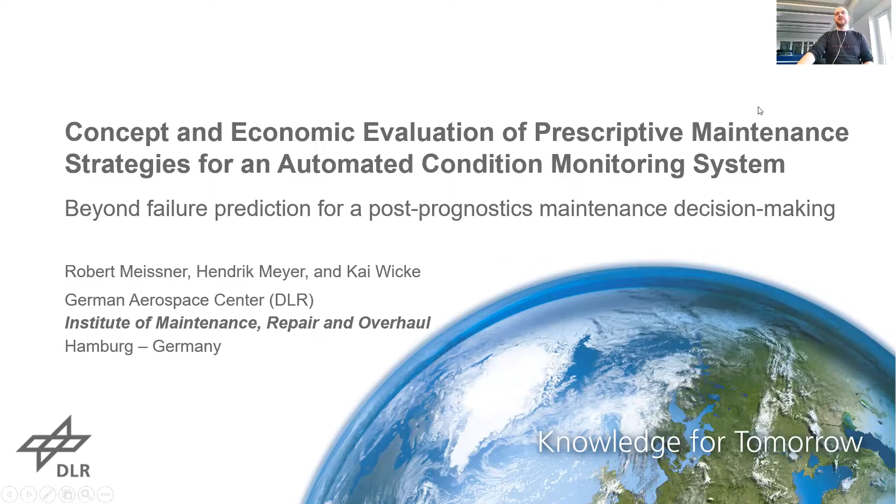Hello and welcome to my presentation with the title Concept and Economic Evaluation of Prescriptive Maintenance Strategies for an Automated Condition Monitoring System. My name is Robert Meissner. I'm from the German Aerospace Center, in particular from the Institute of Maintenance, Repair and Overhaul, located in Hamburg, Germany. First, let me give you a brief overview about the motivation of our study and the objectives we are trying to follow with this presentation.

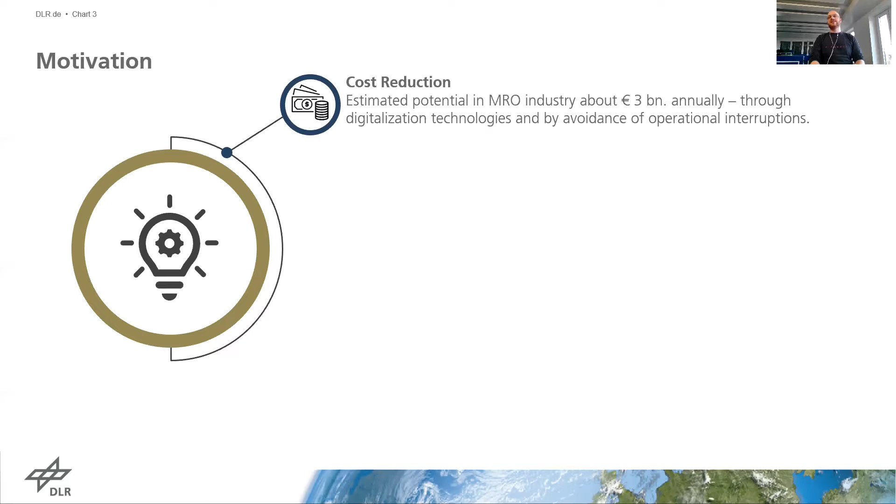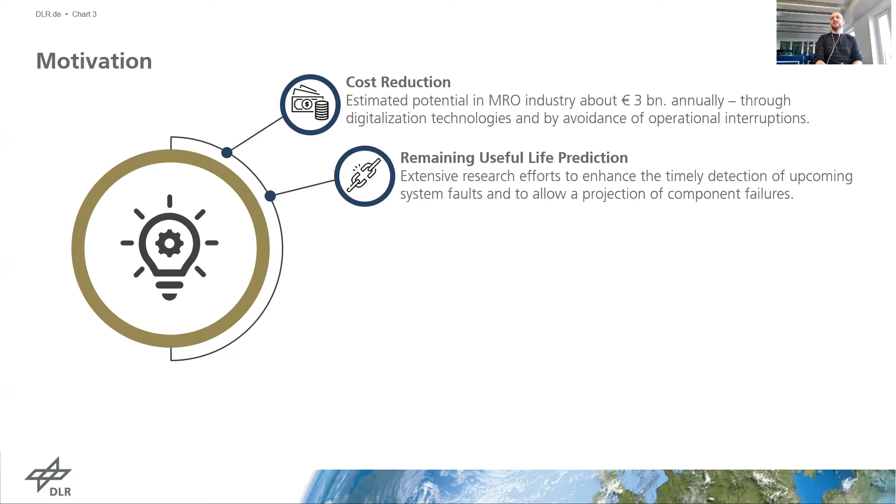The International Air Transport Association estimates a cost-saving potential within the aircraft MRO industry of about 3 billion euros annually, achieved mainly through the implementation of digitalization technologies and the subsequent avoidance of operational interruptions. Additionally, there's an extensive body of literature in the field of remaining useful life prediction, and many of these publications try to timely detect upcoming system faults and allow a projection of component failures.

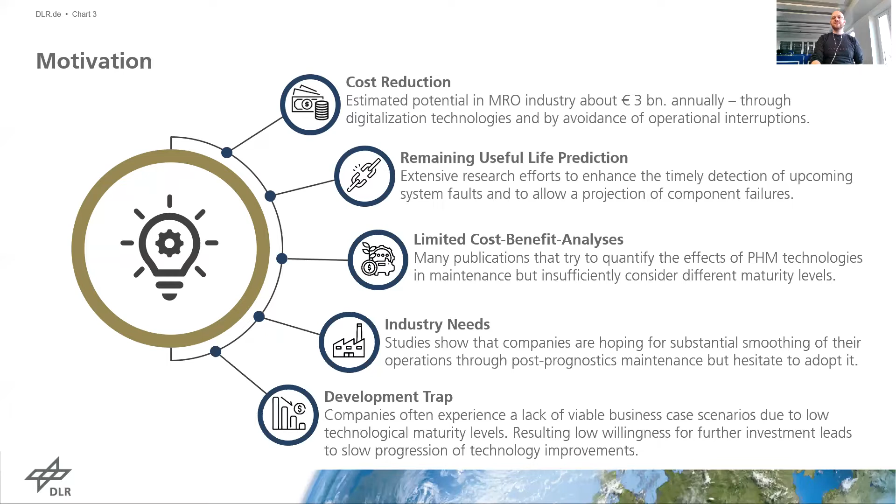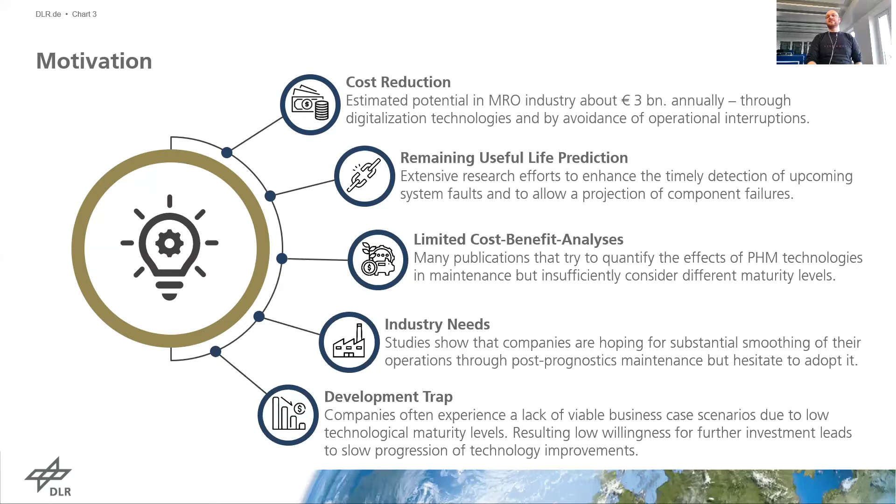Furthermore, there's quite a variety of publications that try to quantify the effects of PHM technologies on aircraft maintenance operations. However, many of these publications insufficiently consider different maturity levels of the underlying PHM technology. Additionally, several studies show that companies are hoping for substantial smoothing of their operations through post-prognostic maintenance, but they are hesitant to adopt it. A lot of this hesitancy comes from the lack of identification of viable business case scenarios, mainly due to low technological maturity levels of the underlying PHM technology. This lack of a viable business case scenario results in low willingness to further invest, ultimately leading to a slow progression of technology improvements.

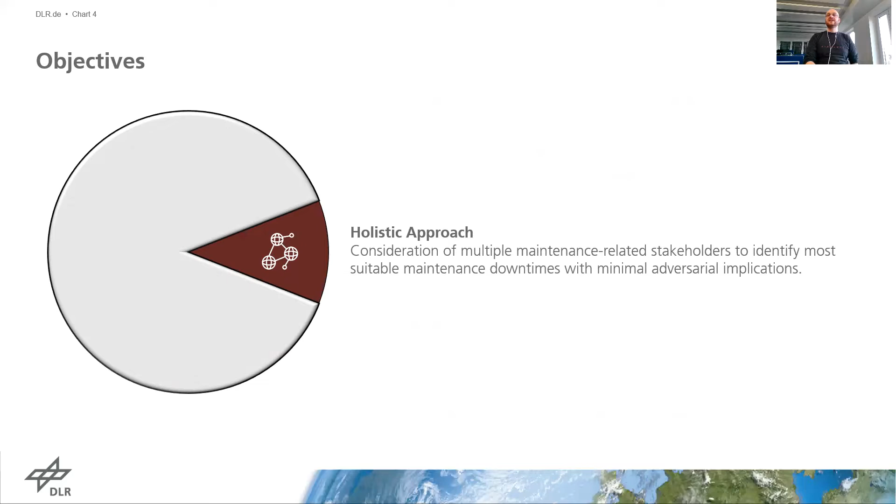We are trying to follow three objectives for this presentation. First, we would like to introduce a holistic approach by considering multiple maintenance-related stakeholders and their individual objectives and needs, to identify the most suitable maintenance downtimes with minimal adversarial implications for each individual stakeholder.

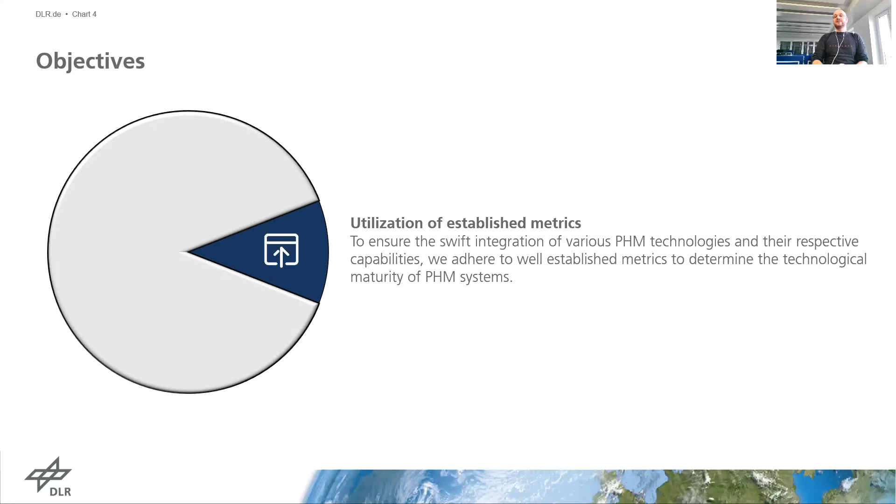Then we want to utilize established metrics in the field of PHM technology evaluation, to ensure a swift integration of various PHM technologies and their respective capabilities, and a quick estimation of the subsequent effect for the technology expert.

Last but not least, to increase the confidence in the viability of our simulation results, we want to calculate different performance indicators that strongly adhere to real-life parameters used by practitioners, and that enable a more complete representation of the expected implications of adopting such a prognostic-based maintenance strategy.

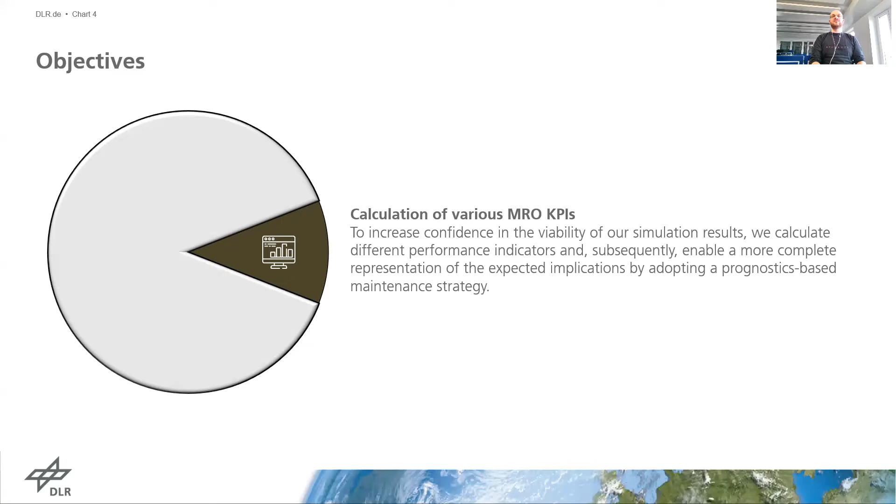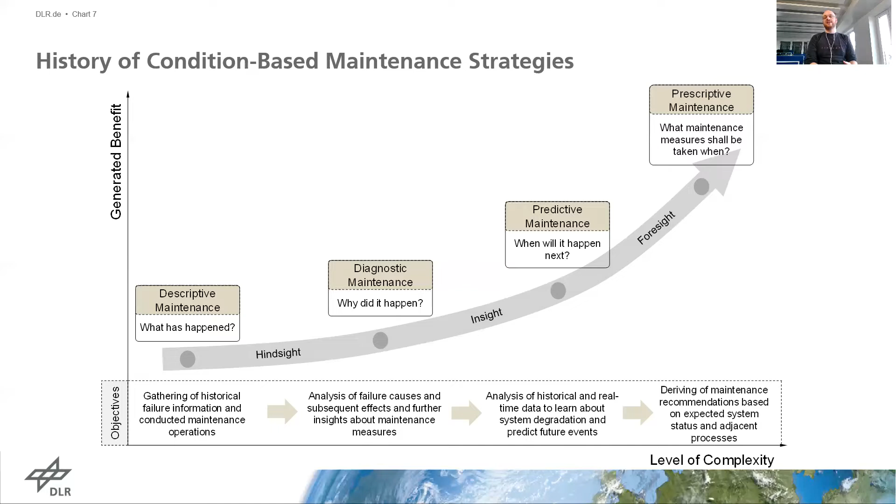If we're trying to answer not only when a specific asset is going to fail, but what maintenance measures I shall take, then we are talking about prescriptive maintenance. There we extend our view beyond the asset itself. The asset could be the aircraft, could be an engine, could be a tire. We try to derive the most suitable maintenance opportunity by considering adjacent processes and the state of the involved stakeholders.

For some of you, prescriptive maintenance might be a new phrase, so let me give you a brief definition that we at least agree on in our institute. We define prescriptive maintenance as utilizing a system's failure projection to minimize the adversarial implications for the involved stakeholders, by an optimized proactive scheduling of necessary maintenance restoration tasks.

As I've shown you, it is an evolution of predictive maintenance, which for us solely focuses on upcoming system failures and doesn't include any surrounding processes. Therefore, prescriptive maintenance, because it does include these surrounding processes, allows a more holistic analysis and optimization of maintenance measures. Let me highlight a few aspects I see as important in this definition.

First, we are talking about a failure projection because this is an evolution of predictive maintenance. This failure projection is necessary to determine the suitable maintenance opportunities and also identify when ultimately our system is going to fail, trying to connect the corresponding tasks to each maintenance opportunity.

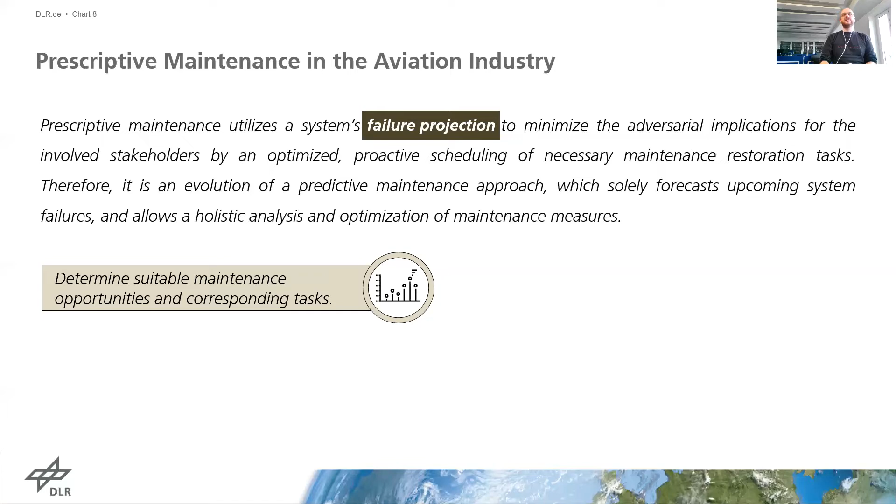Then I highlighted the adversarial implication, indicating that we are not just focusing on pure monetary metric consideration, but trying to extend our metrics towards aspects such as ecological impacts or societal impacts. However, by societal impacts we mean the impacts right now on people working within the MRO industry, and not people outside of the MRO industry.

Then we are trying to shift the focus from the asset itself towards individual stakeholders' needs, because ultimately these stakeholders need to be convinced about the viability of the underlying business case scenario and need to be convinced that spending further on the development of such PHM technologies will ultimately yield any benefit from them.

And last but not least, I mentioned it earlier already, the holistic analysis. We understand holistic analysis by not just focusing on aircraft maintenance operations, but also trying to incorporate different aspects of daily airline routines, such as the airline operation itself, but also subsidiary services such as supply chain management.

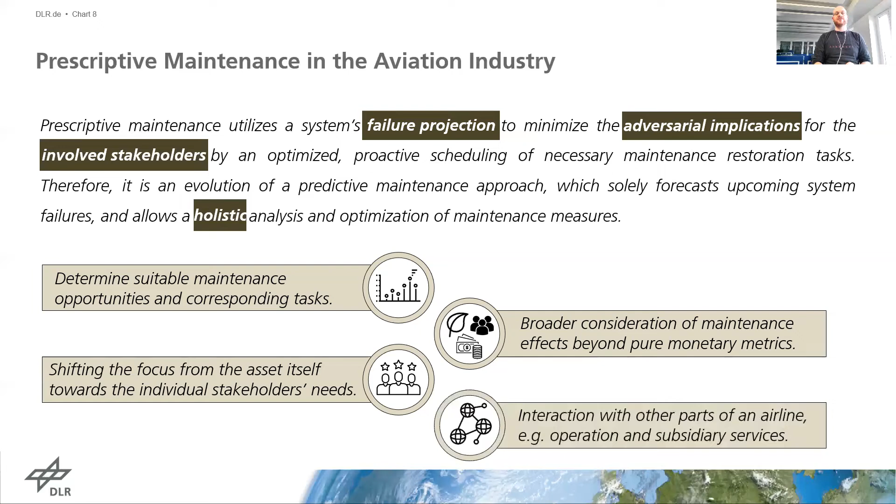Now let's talk about the use case scenario that we have examined with our work here. We had two research questions, one main one and one sub-question. The main one was: how does the maintenance performance change with the introduction of a prognostic-based maintenance strategy? And also, how does it change for different prognostic horizons? The prognostic horizon for us is an indicator for the technological maturity of the underlying system.

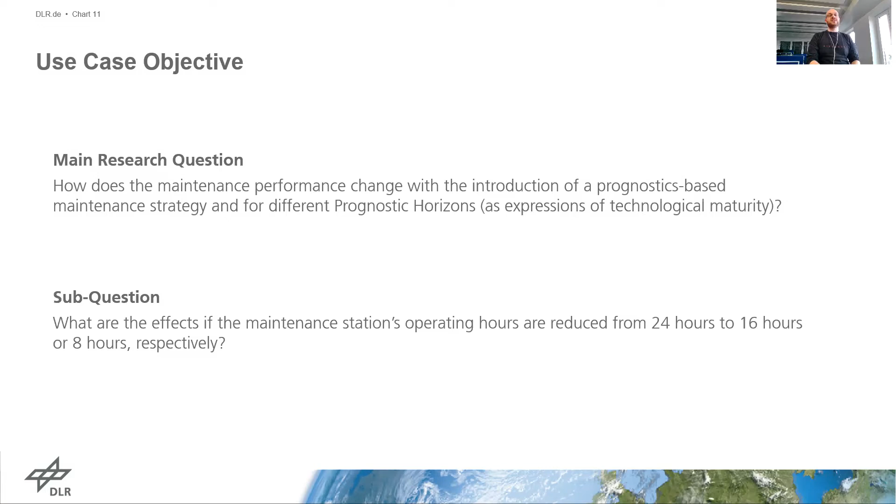And secondly, the sub-question was: what are the effects if the maintenance station's operating hours are reduced from 24 hours to 16 hours or 8 hours respectively? What it means, we will see later.

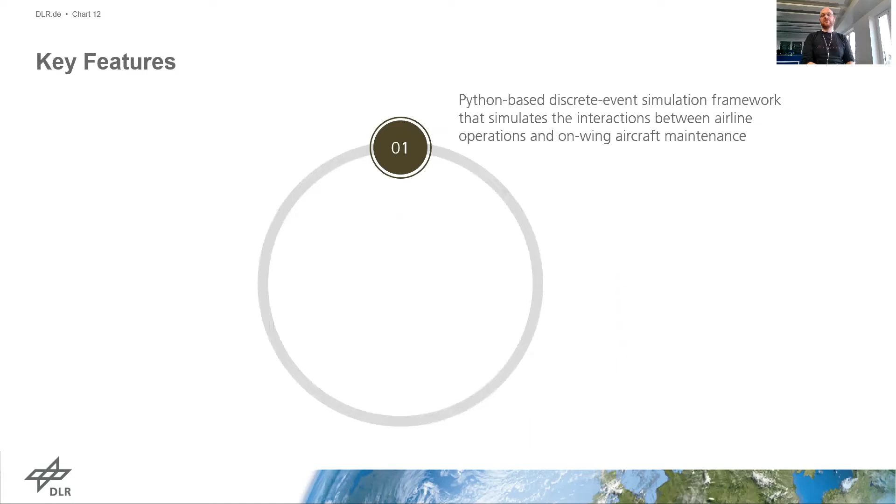First, let me come to some key features of our analysis. For this analysis, we have used a Python-based discrete event simulation framework. This framework is called PREMATE. PREMATE stands for Prescriptive Maintenance Developer. And this framework simulates the interaction between airline operations and on-wing aircraft maintenance. At least in this use case, it does. In reality, PREMATE is capable of extending the interactions and also considering some sort of supply chain management.

Then we have simulated an aircraft fleet that consists of 5 A320 aircraft. And these A320 aircraft have been scheduled to follow a representative pre-pandemic flight schedule from a major German airline.

And we also modeled some limitations of availability of ground resources. These ground resources were mainly available qualified mechanics. And we also limited the available maintenance hub that can be taken and chosen from for the maintenance task execution.

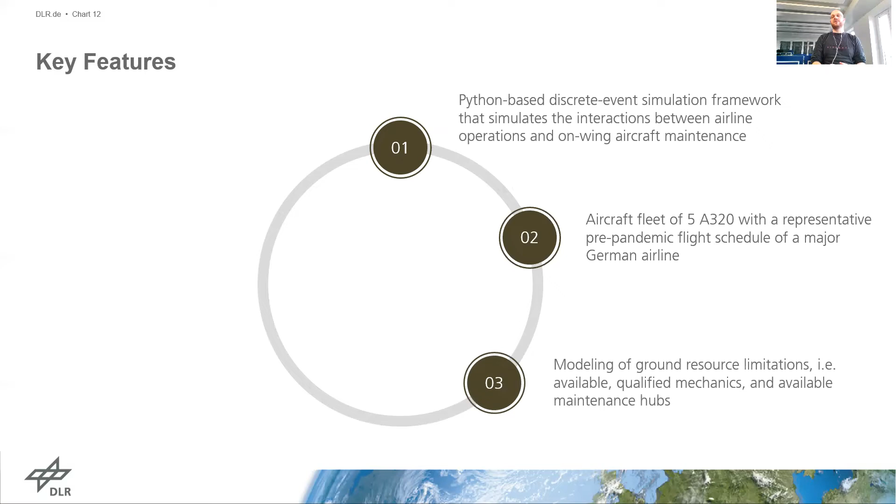Then, as I mentioned earlier, we varied the prognostic horizon of the underlying PHM technology, and we also varied the availability of the maintenance staff, leading to this 16 or 8 hours maintenance operations at our maintenance hub.

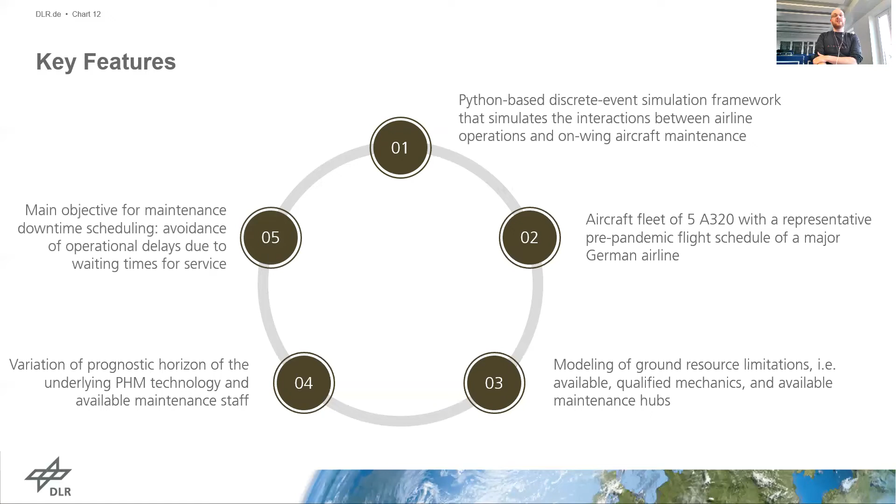And last but not least, the main objective for our maintenance downtime scheduling was the avoidance of operational delays due to waiting times for services. Although there are quite a number of objectives, we didn't choose any monetary aspects, but wanted to stick with the objective to avoid these operational delays.

Our use case scenario was the tire pressure maintenance task. And how does it look like, conventional tire pressure maintenance? Tire manufacturers required aircraft operators to perform a manual tire pressure check every third calendar day. And before a viable pressure measurement can be conducted, there needs to be an extended cool down time of at least 3 hours after landing before such a pressure measurement task can take place.

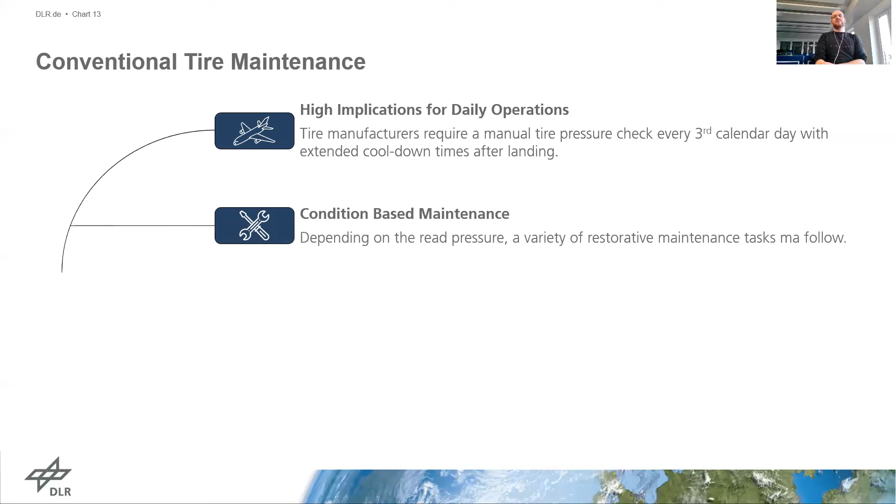Then the tire pressure maintenance task is a pure condition-based maintenance task. Besides these hard time interval pressure measurements, we are having maintenance tasks issued solely on the read tire pressure. And there's quite a variety of these restorative maintenance tasks, and they can range from simple repressurization tasks up to, for deeply underinflated tires, up to a tire replacement.

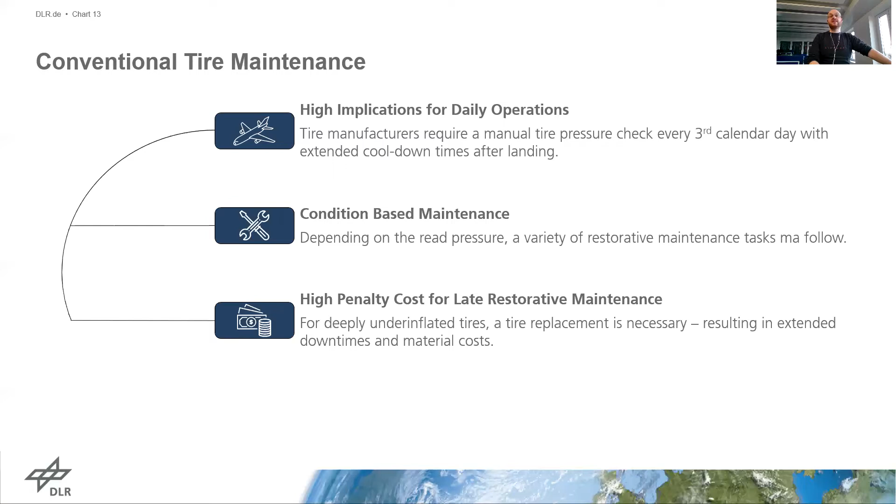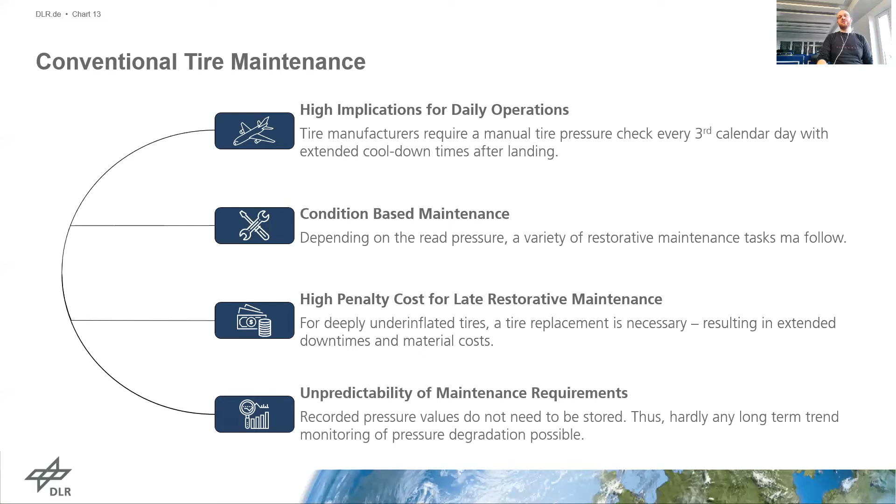And a tire replacement by nature results in extended maintenance downtimes and excessive material costs. And last but not least, because the recorded pressure values do not need to be stored, at least not from a regulatory standpoint, it is hardly possible to enable some long-term trend monitoring of the pressure degradation of the aircraft.

Let me quickly come to the underlying scheduling method that we have applied. So here we can see a timeline, and let's just assume a certain portion of the day is blocked for non-operating hours at our home base. So no aircraft is allowed to land or take off in this specific time frame.

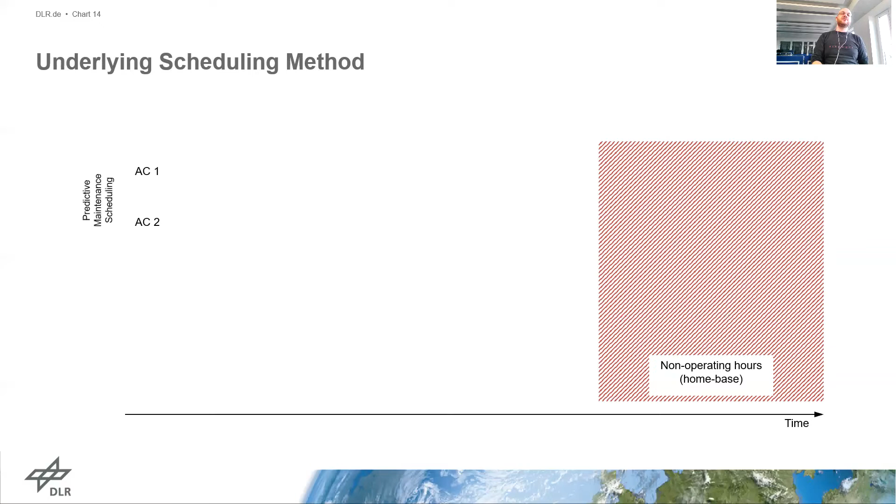And here we have 2 aircraft that are following a certain flight schedule. And first, we are looking into predictive maintenance scheduling. As I said, the aircraft are following our flight schedules, having some inbound flights to our designated maintenance base and some outbound flights to some random outside stations.

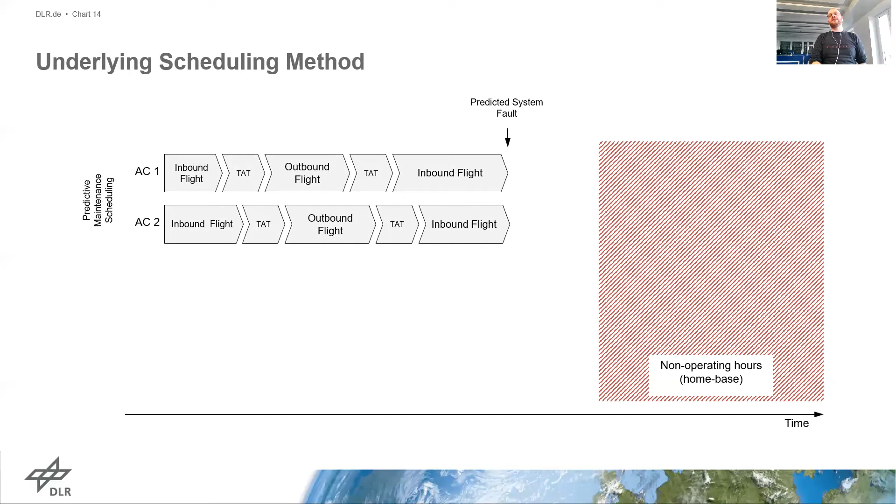And incidentally, both aircraft will require restorative maintenance tasks at the same time. However, I have a limitation of my maintenance resources to just 1 aircraft that can be served at the same time. And therefore, if I choose aircraft 1 to be served, the second aircraft needs to wait for its service to complete.

While the first aircraft has been served, it can commence its outbound flight right before the beginning of the non-operating hours. Right at this point, the second aircraft can start to be served with its maintenance task. However, due to the time shift, the end of the maintenance task has been shifted well within the non-operating hour phase of the day, resulting in operational delays for my second aircraft.

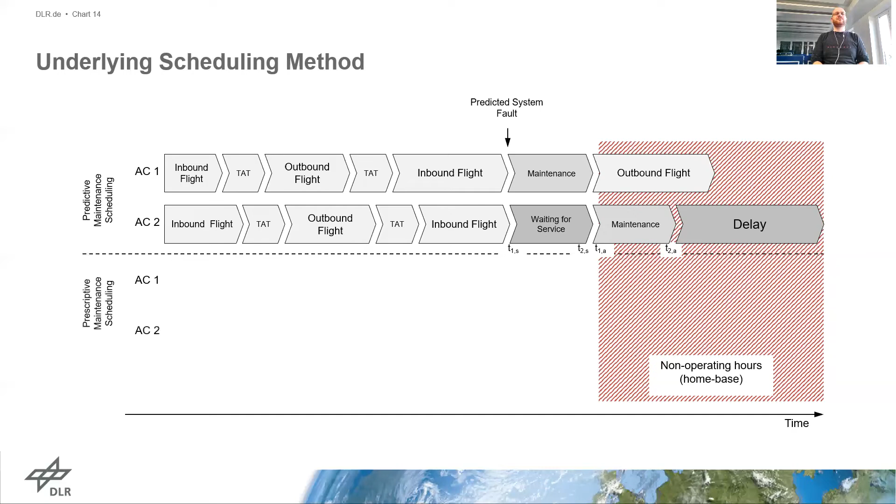So what does the prescriptive maintenance scheduling look like now? I have the first aircraft with an inbound flight, so I'm at my designated maintenance station, and I will reschedule the maintenance task to exactly the time span needed and have it completed for the first aircraft. The second aircraft will just normally continue its flight rotation plan. Once the maintenance task is completed for the first aircraft, it will go back into service and also follow its flight rotation plan.

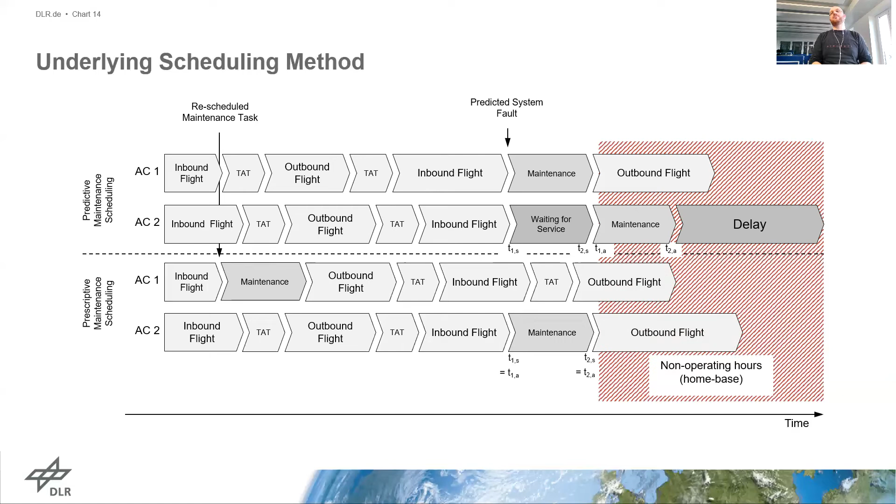Then I'm coming to, for the second aircraft, the predictive system fault timestamp. Now I can see I don't have any other aircraft that needs to be served at that time, so my maintenance task can take place at the intended time slot. This leads to the scenario that both aircraft can commence their outbound flight right before the beginning of the non-operating hour period. So what does it look like now in the results of our study?

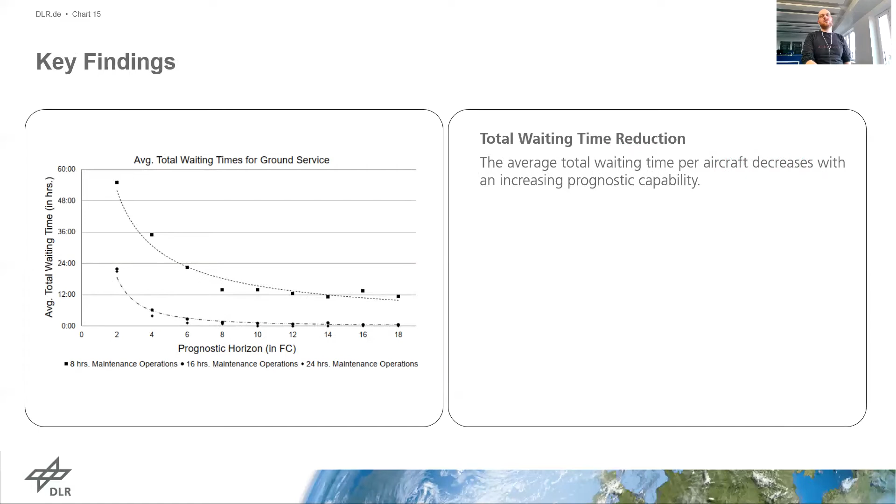First of all, we have plotted here the average total waiting time per aircraft over our simulation time span. The simulation time span here was 30 days, and you can see the total waiting time plotted over the prognostic horizon. First, what we can observe is that the total waiting time is continuously decreasing for increasing prognostic capabilities.

However, at least for our parameter setting, there's a saturation point at about 6 to 8 flight cycles. After this saturation point has been passed, any addition of prognostic horizon capability will yield a decreasing improvement of total waiting time reduction.

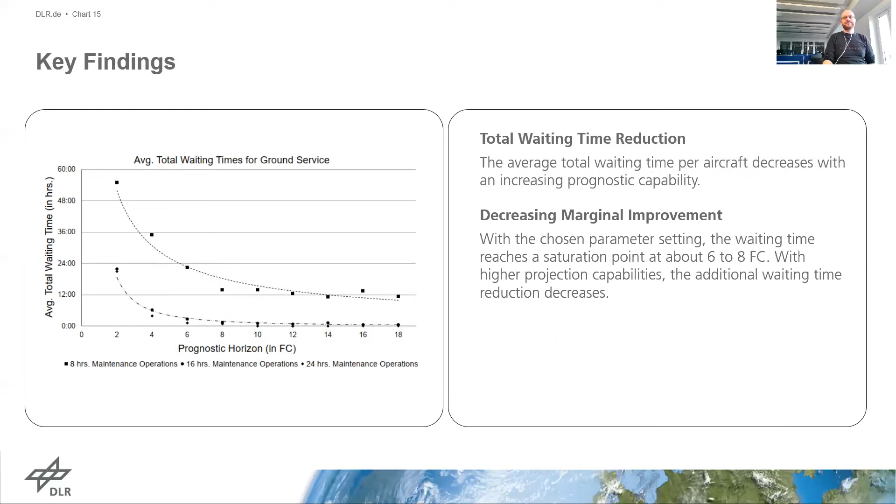Furthermore, as indicated by the different shapes of the little dots here, we can see that between 16 and 24 hours of maintenance operation, indicated by the circle and diamond shaped dots, there's hardly any difference in the total waiting time. However, if we decrease our maintenance operations to 8 hours a day, we can see there's a significant increase of the resulting waiting time for each individual aircraft.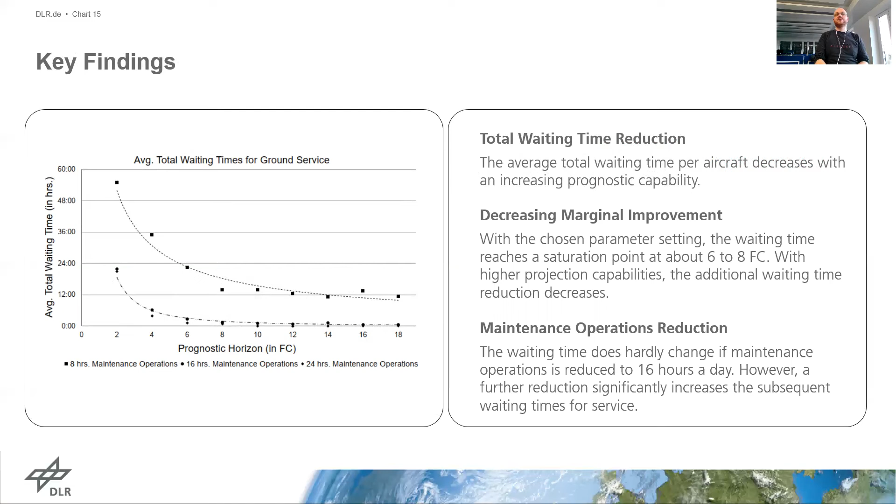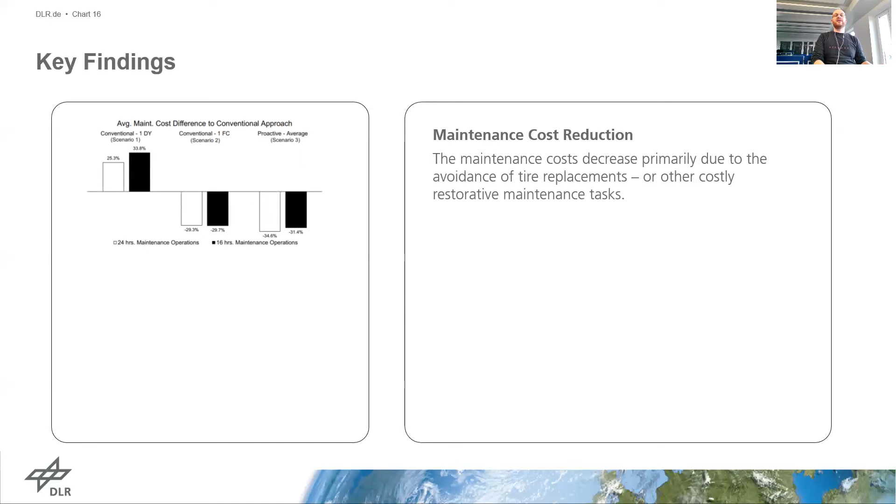If I measure more frequently, I will detect underinflations of my tire more frequently, and therefore I am able to avoid deeply underinflated tires on a more regular basis. However, what I also observe is that due to the little time needed for completion of a manual tire pressure reading task, and therefore the little cost share associated with it, the pure avoidance of manual tire pressure maintenance tasks only yields very little advantage. Therefore, it's much more important to avoid costly maintenance tasks than to reduce short maintenance tasks, such as the pressure reading task, by costly automating or building up an automated infrastructure.

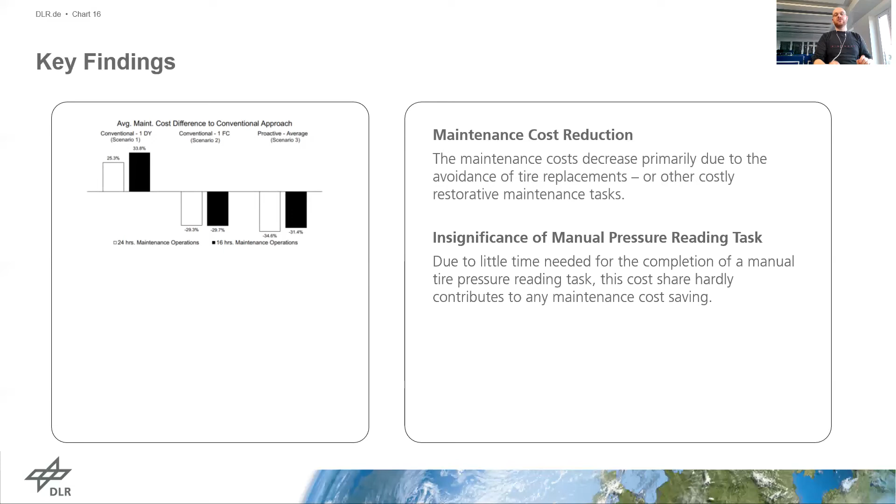This is due to the movement of the maintenance task to earlier time slots where it actually wouldn't be necessary at this point, and therefore this increases the maintenance task frequency. An increased maintenance task frequency combined with the extended cooldown time after landing basically eats up all our improvements by avoiding this competition for the limited ground resources.

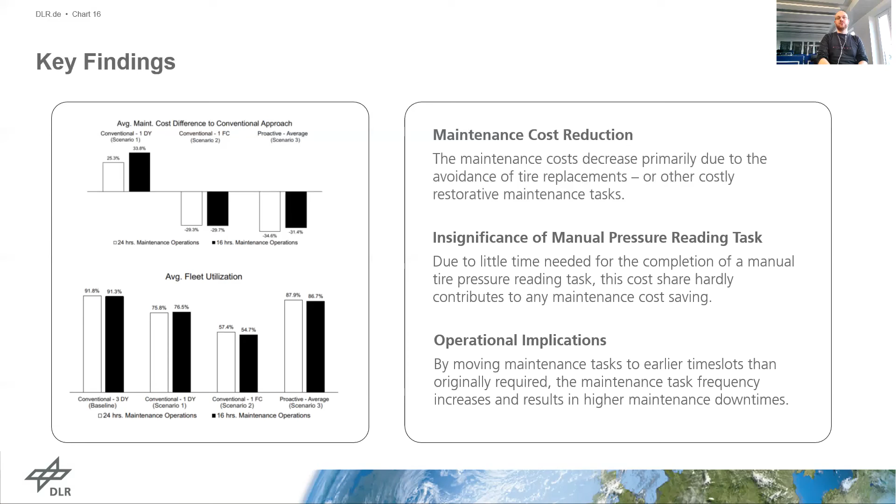So what is the outlook from our studies? What we identify as next step is, first of all, there needs to be some inclusion of environmental factors. Here we have mainly focused on time and cost aspects, but as the focus from our society and attention from politics and regulation shifts more to aspects of sustainability, we are advised to include CO2 equivalent emissions as well into the maintenance task identification here.

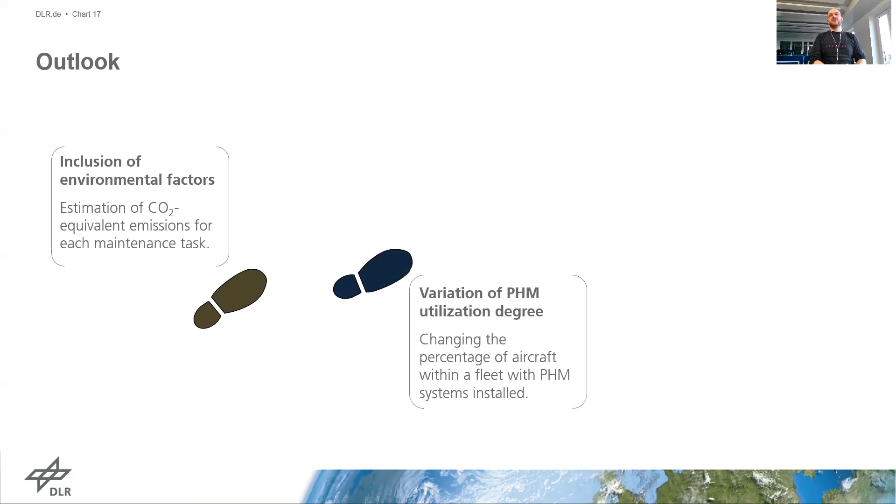Also, for our scenario, we assume that all 5 aircraft are equipped at the same time with the same PHM technology. However, in reality, there would be a continuous rollout of such a technology, and therefore we need to evaluate the effect for a variation of this utilization degree.

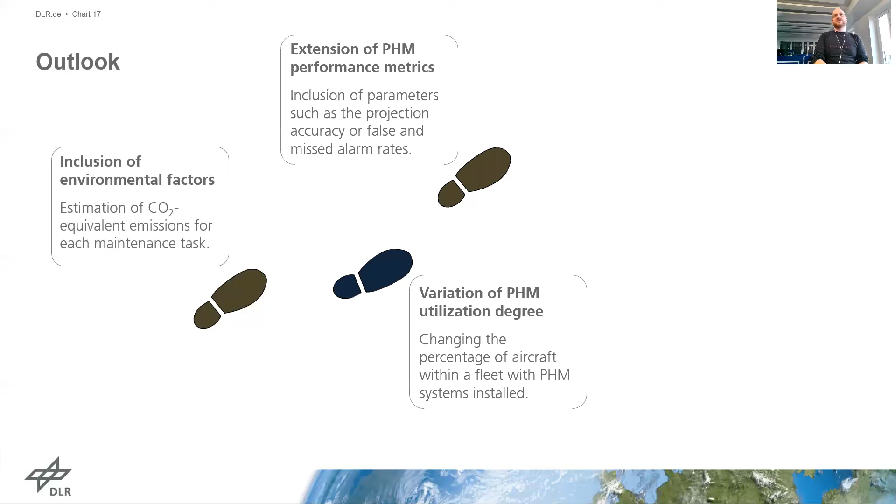Then, of course, we need to extend the PHM performance metrics. Here we have only focused on the prognostic horizon. However, there are furthermore such aspects as projection accuracy and false or missed alarm rates.

Ultimately, we have talked about the holistic approach, but at this point, we only focused on the connection between operations and aircraft maintenance. Therefore, we also need to consider effects such as on supply chain management.

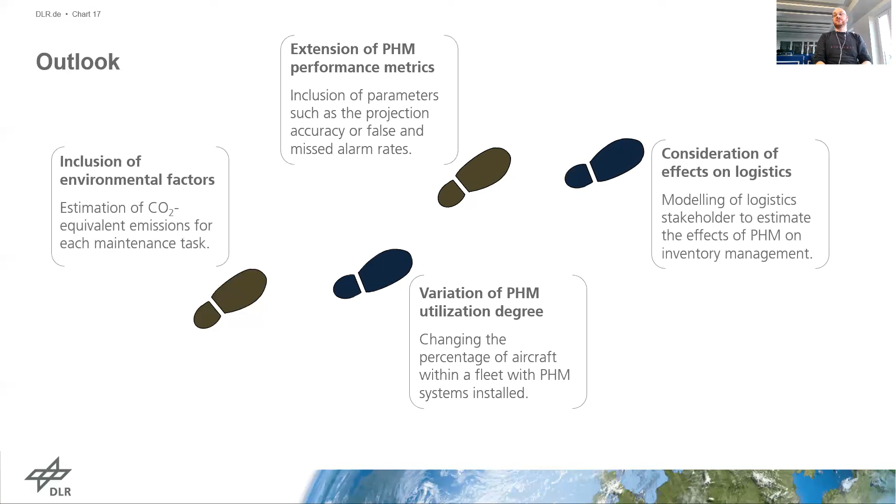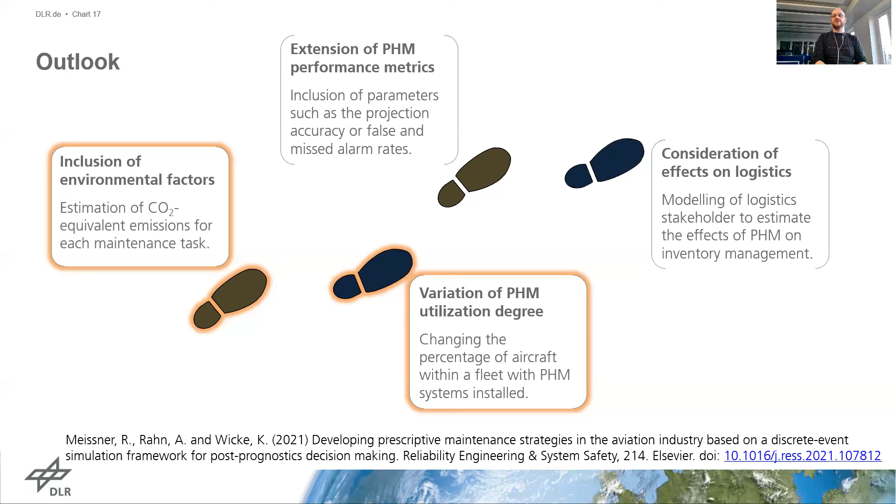For the first 2 parts, I kindly refer to another publication that we have, which has been published in the Journal of Reliability Engineering and System Safety. This is open access, so please feel free to have a look in there.